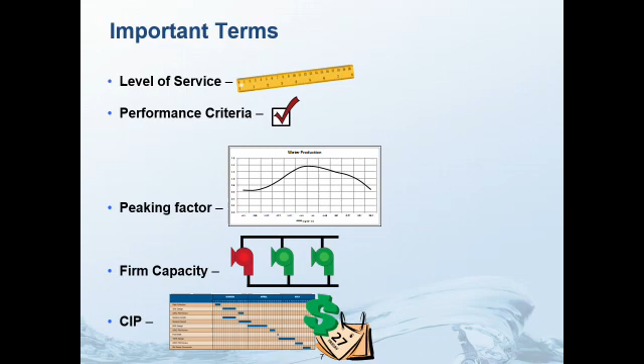Again, CIP stands for Capital Improvement Program, which is a listing of the projects that will be constructed, that need to be constructed. It has a detailed description of each project, cost information, and the timing that needs to be done. You'll see that term quite a bit.

What we're going to talk about tonight: infrastructure master planning, what goes into that, giving you some education about putting together a master plan. We'll get into detail on levels of service and performance criteria. Rob Buss will talk about the condition assessment work we've done. Then we'll talk about some water and wastewater projects and prioritization at another time. So tonight we'll be ending at condition assessment.

As far as infrastructure master planning, this master plan aligns the water resources and infrastructure with Goodyear's general plan. It's an integrated master plan because we're looking at the interrelationships between water resources, the water system, the wastewater system, and the reclaimed water system. Together, those form infrastructure that helps the city create a highly desirable and sustainable place for all to live, work, visit, and play. That's right out of your general plan approved in November, and this infrastructure plan goes to support that vision.

Another diagram in the general plan shows how the general plan forms the foundation for what the city is trying to accomplish to achieve its vision. Within that, we look at master planning for a wide variety of things. Our particular task is on the water utilities.

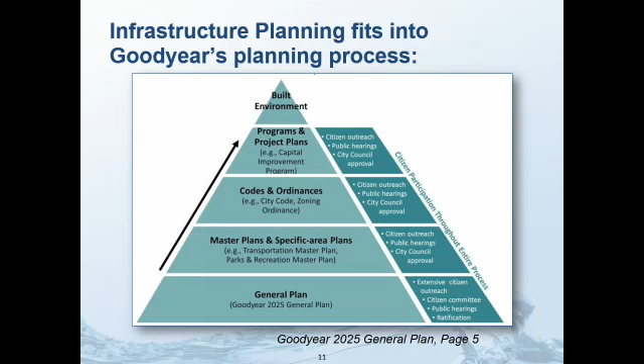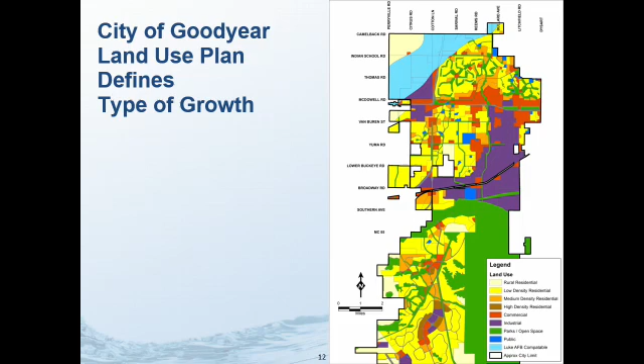The general plan also includes the land use plans. We use the land use plans to tell us the kind of intensity of development that's going to happen, which helps us size the necessary facilities. When you look at the final master plan at the end of our project, you'll notice the pipe sizes are different in different parts of the city, because the intensity of population is different throughout the city. It's responsive to this plan, so we're putting in infrastructure necessary to meet the demands associated with the particular location in the city.

So the integrated water, wastewater, and reclaimed water master plan project has a bunch of major tasks, and I'm going to go through those. The first two are the 5-year CIP, Capital Improvement Program, and a Southern Solutions Plan, as well as a condition assessment project, the first phase of that.

Basically, these two tasks together form the basis of a 5-year plan that is needed for what your existing population is. So we're not looking at anything growth related right now. We're looking at just what it's going to take in the next 5 years according to the performance criteria that you need for the level of service that your city expects.

And then later on, we're going to be doing these other tasks where we go through each one of the water resources, the water system, the wastewater system, and the reclaimed water system.

Normally, when a city hires us to do a project like this, we do the whole thing, and we put together a capital improvement program that's for the near term as well as for the long term. But because you have a rate study going on right now, the city asked us to go ahead and do the first phase of this up front, get it done quickly for the near term for your existing population, and then we will go back and do the rest of it later. So that's how we're proceeding with this project.

So what's the basis for evaluating your infrastructure needs? Well, we're looking at the level of service. This is what the customers expect in terms of flow, pressure, water quality. We look at state statutes as well as engineering practice that dictate what the performance standards are for a water or wastewater system. Those are all performance criteria that go into dictating the amount of capacity that you need for new infrastructure development.

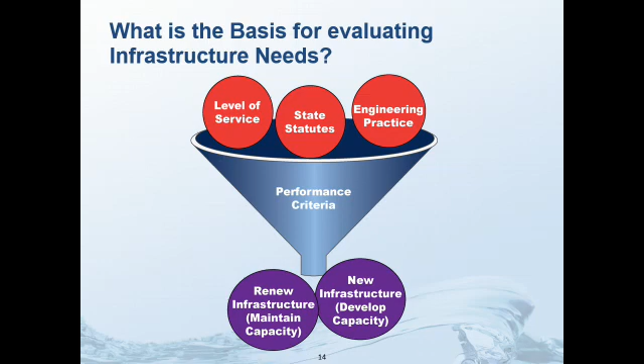But the other part of it is we can't just assume that the new infrastructure is enough to meet the needs. You also have to assess your existing infrastructure to make sure that it's in proper condition to deliver the type of service that you want. So existing pump stations, lift stations, the pipe conditions, that type of thing is the other thing that we look at. And Rob Buss will get into a lot of detail on that.

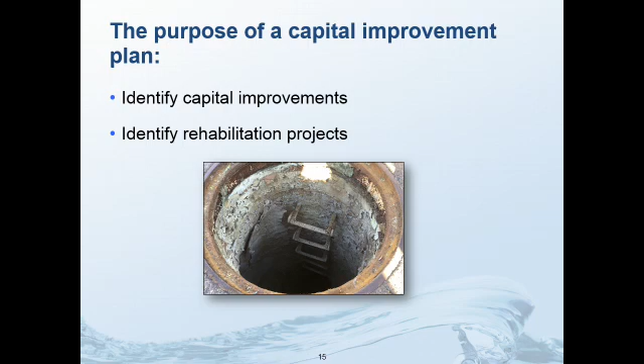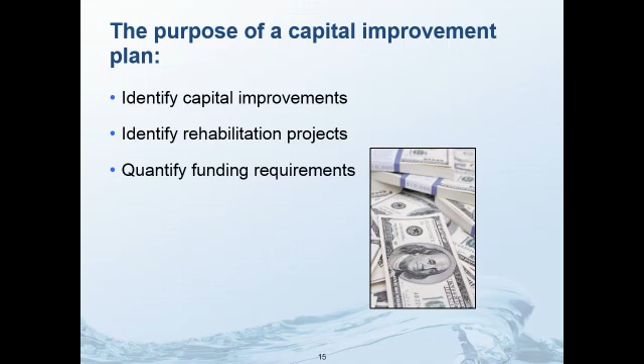With that, we'll take a break just for questions so you understand the basis for how we go forward with the master plan. Any questions at this point? Okay? Okay, Richard?

All right, next we'll talk about the levels of service and what that means and how we use this in our planning work.

What levels of service do your customers expect? This table here that we're going to put up has levels of service in several categories: supply interruptions, minimum pressure assurance, and fire flow, as well as water quality, just to show you examples of levels of service and how those levels of service could vary.

And we're going to rank them from high to low. So number one in this case, we're going to call it level 1. This water system would have no supply interruptions under any conditions. It does have a guarantee of minimum pressures that would be provided at all times, both for normal operating conditions and for a fire flow or other emergency conditions. And your fire flows, as defined by your fire marshal, would be available at any time, day or night, if you had a fire event.

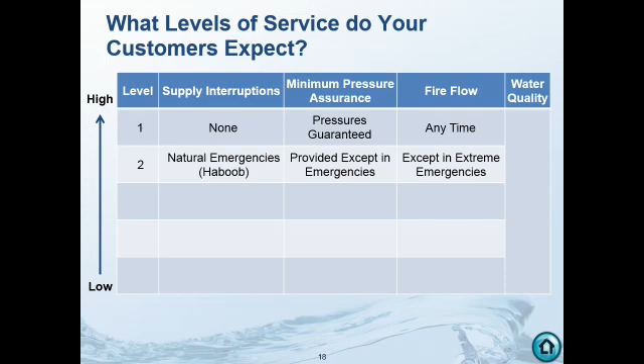The next category, minimum pressure assurance, would be provided most of the time, except in some of these major natural emergency kinds of events. Fire flow would also be available, except there could be some interruptions during these extreme events. Now, you might argue that could also be problematic, because if you've got haboobs, for example, that could be when you'd also have some fairly significant fires and want protection for that.

If you go down to level number 3 on supply interruptions, that would be an interruption to your water supply when you had an equipment failure, a pump went down, a pump station failed, or some other kind of failure of a component of your water system. Minimum pressures are usually provided, but under some circumstances you may not receive your minimum pressure. Fire flow, again, is usually provided, except in some of these emergencies when the fire flow could be disrupted.

The next level down would be supply interruptions during peak demand conditions. Without any infrastructure out, it just means your infrastructure is not sized large enough to handle your peak demands. Your minimum pressures are not always delivered. If you have problems or demands on a hot day, your pressures are going to droop and be less than what you'd normally expect. And the fire flows could be limited. You may, in some situations, not be able to get any water at all during a fire event, or you may get some water, but not what is really supposed to be delivered by the standards.

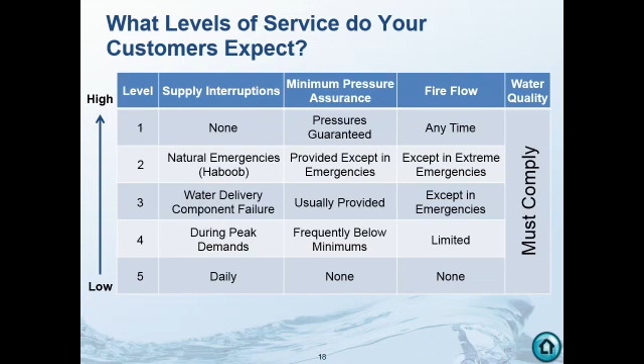So the level of service includes several things in delivering that level of service. It determines the investment a community is willing to make to manage their risk, because you can have additional redundancy in a water system, which costs money to provide, but it also lowers your risk. So it's a balancing act that cities and water delivery organizations have to manage, their costs and their risk. And the third one is customer expectations.

Each of you, as well as your neighbors and businesses and industries in your community, have some expectation about what kind of water service they're going to receive, what kind of pressures and reliability, and what's going to happen in an emergency. In addition, people who may move into your community also have expectations, and they may compare the city of Goodyear with other communities they've lived in to see what you provide in comparison with what other cities might provide.

Investments in a water system beyond the absolute minimum are designed to provide safety and reliability. These are some causes of water supply interruptions.

These are not necessarily all the causes, but you can have well failures, well water contamination, equipment failures, hazardous material releases, an extended power failure, waterborne diseases. You have issues with drought, pipe failures, or vandalism. There are any number of problems or disasters that could happen that could interrupt your water supply.

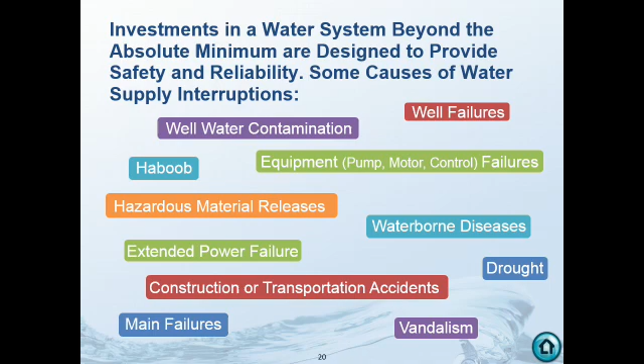So then we come back to the question: what reliability do you need, and what are you willing to pay for? When it comes to predicting future failure events, sometimes the question we're asked is, can you tell me what would happen if I don't do this or if I don't do that to enhance the reliability of your system? What am I protecting you against?

It's impossible to predict future specific failures, just like it's impossible for me to predict when you or I might have a flat tire on our car, or when we might have some other component go out. We don't know the future. However, there are some things we do know.

The ultimate failure of most infrastructure is guaranteed. The infrastructure you put in may last a very long time, some may last more than a person's lifetime, but ultimately infrastructure fails, electronics fail, mechanical equipment wears out, and you have things such as corrosion that contribute to failures in a system.

So it's not about putting in a water system and infrastructure to protect against specific events. It's a matter of putting in infrastructure to protect against a variety of different events that could occur, with the hope that if you do it right, you can avoid interruptions to water supply that your customers might expect.

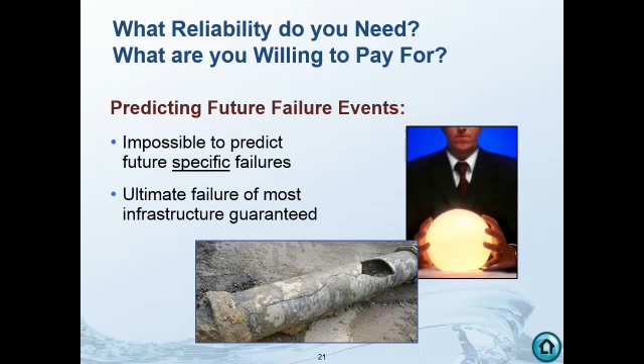So when we come to developing standards for safety and reliability, it's a little bit analogous to a car. Any car that you buy on the market today is going to have a spare tire. It's going to have a backup parking brake that you could use in an emergency. Cars all have a dual latch hood, so if the first latch fails, your hood doesn't come flying up in front of you so you can't see. Cars have seat belts plus airbags, and there's spare electrical fuses in the jockey box or in your fuse container.

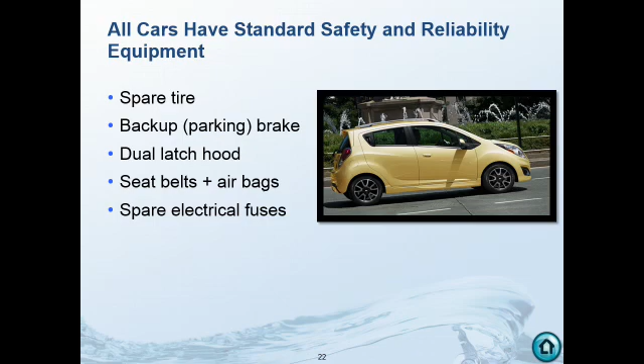The performance criteria that we use for water systems is designed to do something similar, to provide a standard redundancy for water systems, to provide the level of service that is expected for a water system. Providing water supply is a weighty responsibility. You've got thousands of people who are depending upon that water every day for their service, and most communities also have people that have health issues or kidney failures or other things that also depend on a reliable water supply.

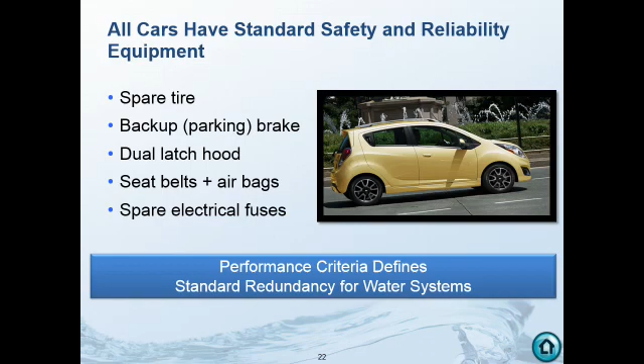Now let's look at a couple case studies that have happened here in the Valley in recent years to evaluate water supply and what happens when a failure occurs.

The Val Vista Water Treatment Plant is located in Mesa, and it is co-owned by the cities of Phoenix and Mesa. A few years ago, you may remember we had the Rodeo-Chediski fire that burned a large area on the Salt River Project drainage area. And inevitably, when you have a large failure like that, you have storms and then runoff, and then the water from that area is contaminated with the ash and carbon and so on from that fire event.

Not too long prior to when this occurred, the city of Phoenix undertook a project to optimize the operation of their system. So they did some studies, and they had some consultants help them figure out what they could do to reduce their operating costs to be able to operate their water system at a lower cost.

Then when this event happened, they had an emergency, and they had to issue a boil water notice telling people they had to boil water before they could drink it. And that created problems that was certainly less than the expectations that many of their customers had.

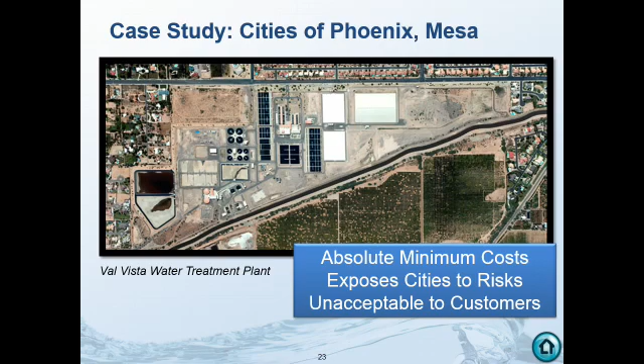So now let's look at another event, and this particular case study was the city of Goodyear last summer.

Of these wells, 2 go into the reverse osmosis treatment system at that site. The other 3 deliver water to a storage reservoir at that site. The 2 wells have treated water that goes into that storage reservoir, blended with water from the 3 other wells that don't quite meet the standard, but when blended with the treated water, it does meet the standard.

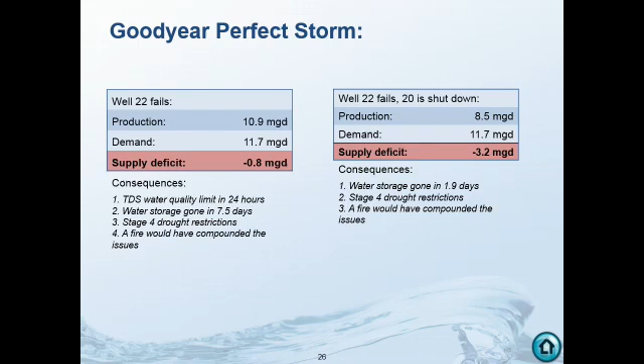When you have damage to public trust, it also becomes more difficult to obtain funding with that lower level of trust. And then if it occurs over a longer period of time, that can constrain growth and development, if people who would move to the city would perceive the level of water supply service to be less than what they might expect.

So now we're at the next point where we can stop and ask questions. Do any of you have questions over the things we've talked about in the last section?

I've got a question. On page 11, you were talking about reliability studies. You kind of breezed over it. I'm just kind of curious what type of HALT testing has been done with some of the capital equipment. Are you familiar with HALT testing? That's highly accelerated life testing for products. So typically like that VFD unit, it had to have gone through some type of testing.

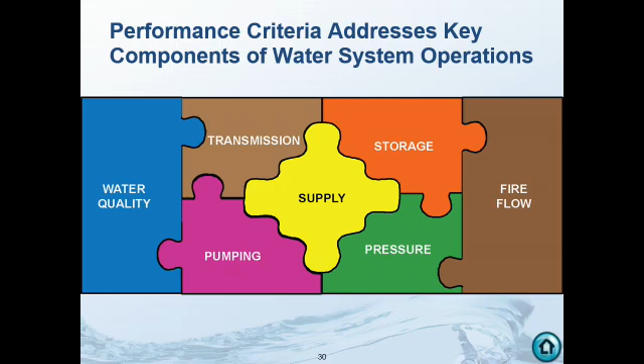And so we're going to go through and talk about these, with the exception of water quality, since you don't really get to make any choices about that, and there's a lot of constituents that would make it a complex presentation by itself.

First of all, let's talk about the standards that are the state minimum requirements, as shown in the Arizona Administrative Code, which also references another document called Engineering Bulletin number 10, which is a water supply system design document.

Now, these standards, as it says, are minimum standards, and they were also designed to apply to everything from a small residential neighborhood that may only have half a dozen houses and is not connected to any other municipal supply, all the way up to the city of Phoenix. And so with these standards, we need to work with them and apply them to the specific needs that every community has.

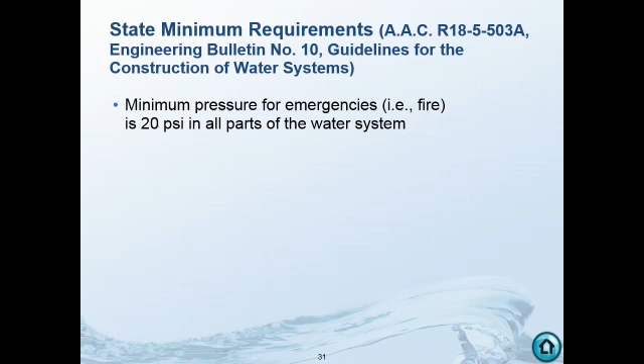The first standard is the minimum pressure for emergencies, such as a fire, is 20 psi in all parts of the water system. That one is very standard. Everyone expects to be able to deliver that.

The next one is that the minimum non-emergency operating pressure is 40 psi, and most cities strive or plan to be able to deliver 40 psi. There are some cities that have a goal of providing a higher pressure.

The next one, pump station firm capacity, is equal to the pumping capacity with the largest pump out of service. Guy touched on that briefly. So any pump station that's designed to deliver water service will have one spare pump in it.

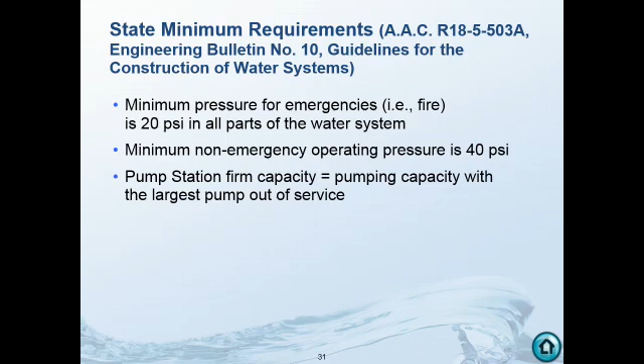The next criteria is minimum water storage, which is equal to the average daily demand of the maximum demand month. This storage criteria is directly out of the Arizona Administrative Code. There are some situations where cities may have different criteria based on their unique situation and requirements.

The next one is fire flow according to current ISO standards. When we do planning, we typically have a residential fire flow amount we need to deliver and a commercial fire flow amount. When you actually go to construct buildings and your water system, there are specific fire flow requirements your fire marshal will have for specific buildings, dependent upon the building type and method of construction. ISO stands for Insurance Services Office.

And then, as I mentioned, all water quality standards.

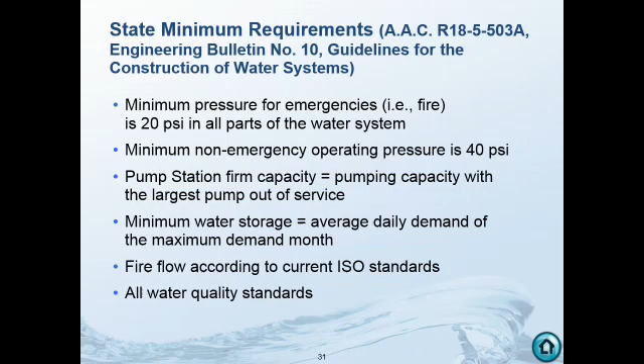Now I'm going to go through the specific performance criteria that the city of Goodyear uses. The pressure performance criteria is to maintain pressures between 40 psi and 80 psi. The reason 80 psi is a limit is that for pressures higher than 80 psi, a service line pressure reducing valve is required to protect water heaters in homes.

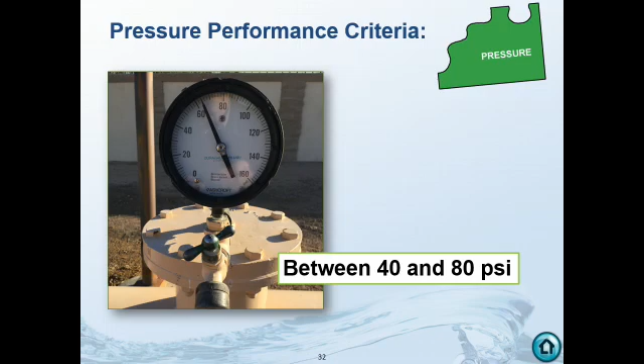The next criteria, water transmission performance, is also essentially the same for all cities. For any pipe less than 36 inches in diameter, they design to keep water velocity less than 5 feet per second. For pipes greater than 36 inches in diameter, they allow velocities up to 6 feet per second.

For peak hour demands, the peak hour being the highest demand hour of the day, the standard is to keep velocities less than 7 feet per second. For fire flow demand, velocity is to be less than 10 feet per second.

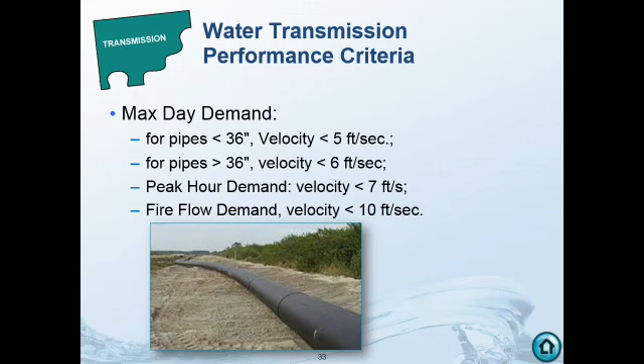All of those affect the sizing of the pipe to keep within that tolerance under those conditions. One reason you want to keep velocities lower is that energy loss increases with the square of the velocity. So when velocities get too high, you also start to get very high pumping energy costs, and it becomes very difficult to deliver fire flows.

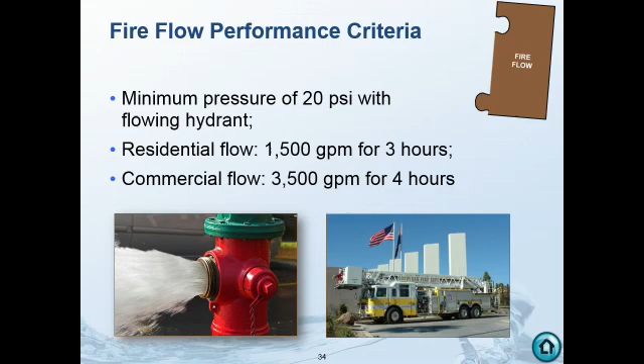For the fire flow performance criteria, the minimum pressure is 20 psi with a flowing hydrant. For planning level work, the city uses a residential fire flow of 1,500 gallons a minute for a duration of 3 hours. For commercial flow, it's typically 3,500 gallons a minute for 4 hours, and commercial flows will typically require more than one hydrant.

For the water supply criteria, the standard we've been using is to supply the maximum day demand with the largest well, plus the wells required for blending, with the largest well out of service.

Your circumstances are a little unique right now because the wells 20 and 22 we referred to earlier also happen to be your wells with the greatest flow rate. So if one goes out of necessity, the second one is not used in order to keep your water quality standards. This is how firm capacity applies here - it's kind of your weak link in water supply. When this one well goes out, it takes the other one down, so that's the focus of the vulnerability you've got. In your case, your firm capacity definition is a little different because those two wells are tied together - that's your vulnerability.

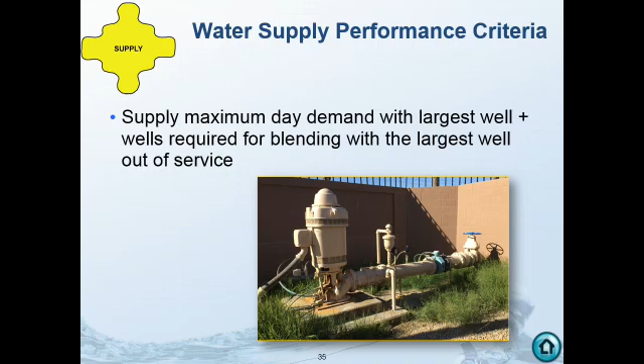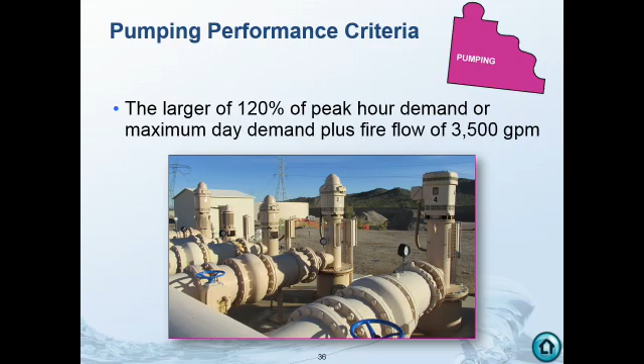The multiplier of 120% provides a little cushion, used for several reasons. First, any city, particularly one that's growing, commonly has higher peak demands because they have more customers who've moved in from the previous year. So it's difficult to precisely predict exactly what your peak hour demand is going to be. We also can't predict the weather and other factors that influence peak hour demand. So that 120% factor provides a level of conservatism to make sure you're covered if you have any undesirable events that would tax your pumping system.

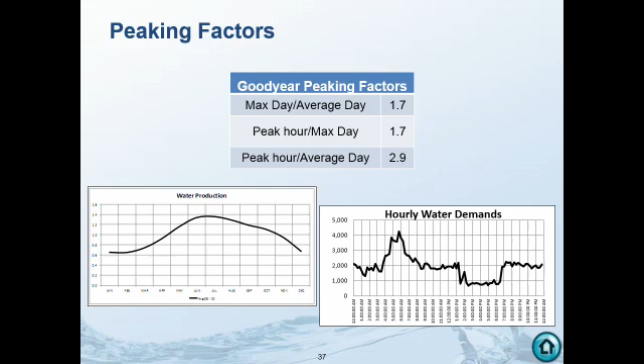Your water storage performance criteria comes directly from the state statutes, which is equal to the average daily demand during the maximum demand month. So you'd take your June or July demands and average them out for that month, and the standard is that you provide storage equal to that amount. So essentially you have one day of storage available any day throughout the year.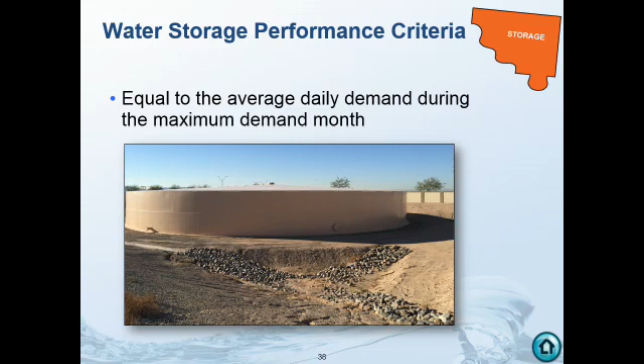So that is a brief overview of the performance criteria that we've applied for the City of Goodyear. Do you have any questions on that?

One quick question. You talked about fire pressure, pump pressure. Does irrigation have anything to do with any of this, or is it similar? Or were you just talking about residential and commercial? Well, the criteria would apply to all customers, including those who are irrigating. Okay, same pump pressure for irrigation. And typically the peak day is because of irrigation in the summertime. That's what we're dealing with, trying to meet demands associated with outdoor water use. Thank you.

Okay, any other questions? Turn it over to Rob now.

So before Rob gets started, Richard's part of the project was to look at what's necessary, looking at the performance criteria and how the system is performing according to those criteria for your existing population. Now what Rob is doing is looking at your existing infrastructure to see if it's still in good enough condition to work and be reliable to meet customer demands. So there are two components, if you recall the funnel diagram: first, what you actually need according to the performance criteria, and second, how it's performing and what we need to do about it. That's what Rob looked at.

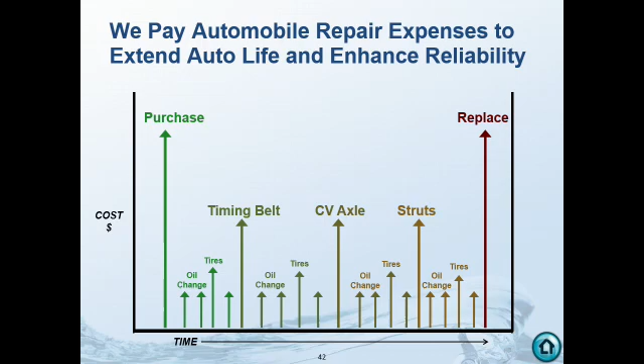And so you bring that over to water assets, wastewater. It's a little slightly different in that you're looking at some different components, but also the consequences are different, because you have a staff and you run a city that people trust you. They're trusting you to provide basic services.

For the buried assets, again, short time frame, we did not do any investigation of your buried assets other than desktop. The city has a very robust GIS system. All the assets are identified with a unique identifier. On the water side, pipelines, valves, fire hydrants. On the wastewater side, pipelines.

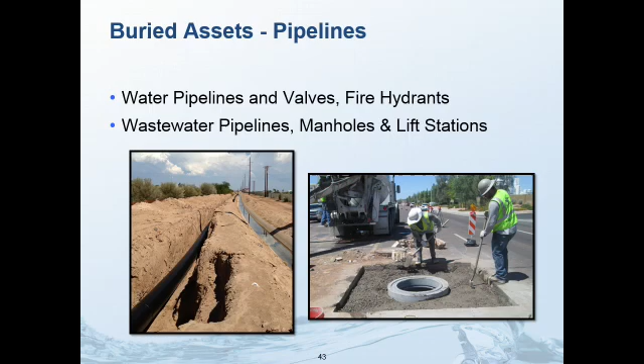So we approached our condition assessment from two angles, as it were. I had a team in our Phoenix office that took the GIS system, looking for material and age, primarily, because for buried assets, not unlike plant assets, the material that you select is real important. And I think to your point, Mario, a VFD that's 17 years old is really old. Just is. The technology has gone beyond 1998 for VFDs, if you were to do that today and buy one. So age is an important component to consider, or element to consider, when you're analyzing useful life.

There's some good news, though, for you. On the water side, your water system has about 96% of the water pipelines are ductile iron pipe. Ductile iron pipe is a step above cast iron. Many people know the term cast iron. Ductile iron has more forgiveness in the sense of impact. That's the word ductile. You're able to have some flexibility with it. The material life of both, though, is about 80 to 100 years. 96% of your water lines are ductile iron.

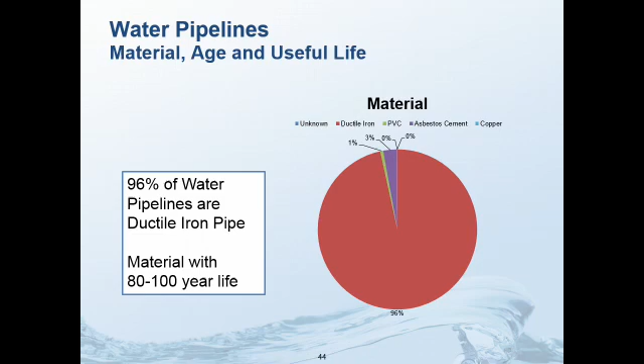I feel pretty good living here, unless they were all 100 years old. However, in your case, there's still good news. About 65% of them are only 15 years old. I think Richard mentioned earlier about some of your assets will outlive us, and they will. I mean, hopefully they will. Maybe your children's children, we don't know. But just based on industry standards, your water system should outlast your children's children, just in sheer wear and tear and the second law of thermodynamics, as it were, everything wears out.

And I might add, just one benefit of having such high quality materials for buried assets is that these are in your streets. So you don't want to be ripping up the streets, replacing things constantly like you would a VFD or a pump that's above ground, because it disrupts commerce, causes problems with the roadways, etc. So part of the reason typically engineers specify a higher quality material for something that's buried is because you don't access it frequently.

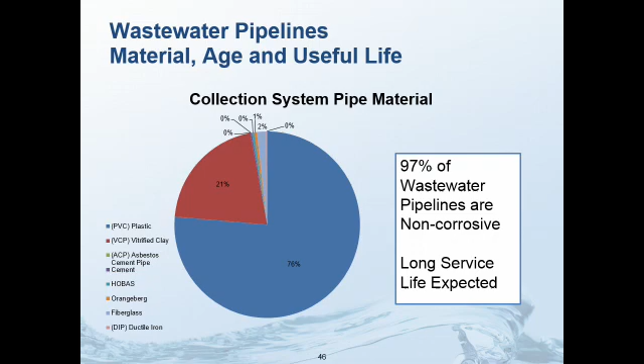Let's go look at your wastewater. You may be wondering, how about that? Well, the main component or the main element to think about is corrosion in your wastewater system. Again, some good news. About 97% of your wastewater pipelines are non-corrosive. If you look at the pie chart there, about 76% are PVC and another 21% are vitrified clay. Both are not susceptible to hydrogen sulfide, a lot of the corrosive components that are in wastewater over time anyway. So in terms of material selection, that's good news.

In terms of age, it's still good news. Again, about 65% of your wastewater pipelines are only 15 years old. I didn't give a specific lifetime for vitrified clay or PVC. Generally, buried PVC, unless you've got some chemical from an industry, should last for 50, 80, 100 years. We don't know - it's a fairly new product industry-wise. I mean, it's been around since the 70s or 80s, but that's fairly new industry-wise. Vitrified clay, of course, is hundreds and hundreds of years. So, again, some good news up front.

So on your buried assets, we really had nothing particular to add to the conversation in terms of CIP for the 5-year. My job was to look at 5-year - what is it in a 5-year CIP that we've looked at, does Goodyear need to include in your CIP? And from the water side, there was nothing. You are going to see things related to your manholes, and that's very, very common here in Arizona particularly. So you will see that in the 5-year CIP.

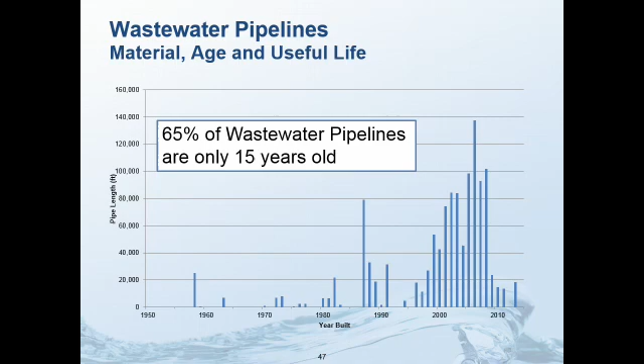Want to look at your plant assets. We took a team of civil, structural, instrumentation, and electrical engineers out on several days, again in a kind of compressed time frame. We worked with your staff to go to every site, every well site, booster pump station, particularly the Bullard RO campus, all 3 of your wastewater treatment facilities, all your lift stations. It was kind of a blitzkrieg, going to each. I'm not going to represent that it was completely thorough, because how could it be?

It was an appraisal level assessment, but it was something that had not been done before. We gave a report to the staff that has, in the appendix, all of the forms our staff was required to fill out. The form itself was a field condition assessment form which guided every person's thought process when looking at the asset. It had questions related to corrosion, vibration, heat, and in structural concrete, looking at cracks or spalling, things that are pretty obvious to see as you're going through each facility.

But the thing I really looked at, and I asked the team to make sure they rated overall each facility, was on a scale of 1 to 5. 1 means it's essentially brand new. You had no 1s. 5 meant you really need to replace it today. There were a couple. The 4s and 5s all made it on our 5-year CIP list. There were a couple 3s that also made it on the list, but generally it was 4s and 5s.

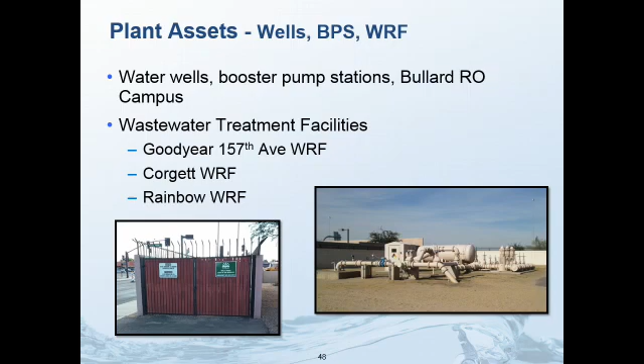So we took the inspection date and subtracted out the installation date, and all of them were essentially 50 years or older. The standard used here in Arizona for well life is somewhere between 40 and 50 years. So when you drill a new well, you may as well put it in your books for maybe 40 to 50 years for the well, not the pump, the casing. So 3 of your wells, we concluded, have no useful life.

They're working. You're like me. I've had tires that I go to discount tire, and the guy says, I'm sorry, I can't serve you unless you change that tire, it's just gone. I said, well, I don't have the money. I got to use it.

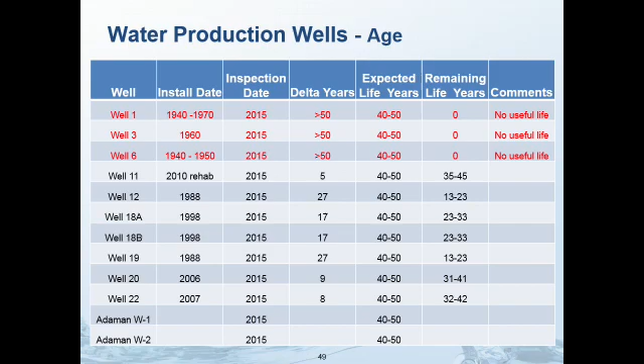But again, you're in a position of trust. You're in a position of, now I know. What am I going to do about it? I'm responsible for what I know. And there are the 3 wells we concluded need replacement.

And we found 3 more wells, identified partly through videos taken by the staff over the past several years, that need rehabilitation. So if you look at the total pumpage, we think we have 8,910, but we know about 3,000 of that pumpage may not be available to us in the next 5 years. Something may happen to the first 3 wells. The next 3, we don't know. So about a third of the wells then need replacement or rehabilitation, and that's reflected in the CIP that you'll see at another time.

Any questions? No, okay.

When you say replacement, do you mean replace the parts or drill a new well? On replacement, I mean replacement, a new well, drilling a new well. And we've talked to staff about it. We've had some discussions on how best to do that, and it's all reflected and bundled up in the CIP that you'll see later.

So that probably goes back to, was it page 45, where you said 65% of the water pipelines are 15 years old. I was going to ask, what about the 35%? But I think that's covered in the later slides. 65% are 15 years old.

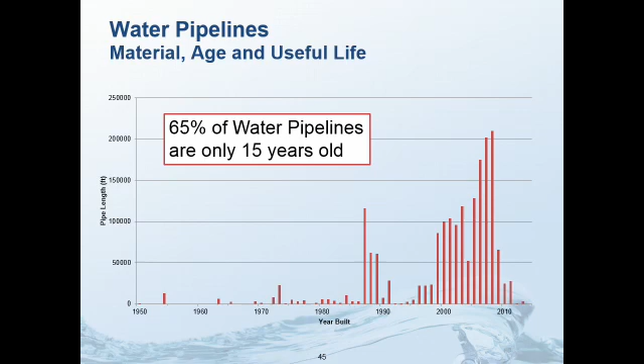So 35% is represented essentially sooner than the year 2000. I had to cut a line somewhere. So I said the last 15 years, 65% of your water lines are fairly young. You've got a lot of life left. But 35% are older, so I'm not sure if I'm helping there, but hope that makes sense. Does that answer your question, Chairman?

Sort of. Well, I wanted to know a little bit more, just to switch on you real quick, about the appraisal level. You had this field condition assessment. I was just wondering if you can talk a little bit more about that.

The 1 to 5, you mean? Yeah, that assessment that you've done, that allowed you to create your slides on page 25, right? You said there was an appraisal level or field condition assessments, rated from 1 to 5. Yes. And then I really didn't see a slide that had that rating from 1 to 5. Maybe I missed it. Well, no, you didn't miss it.

We didn't have it. Actually, my part we figured would be somewhat toward the end, only because the bigger part is probably the performance criteria. I have all the forms that we took. The actual criteria is: 1 is essentially new. 2 is you might have to commit like $50,000 — it's a judgment call of what you need to bring it back up to a 1. 3, you can see where this is going, it gets bigger and bigger.

At 50%, at a 5, if you look toward the end there, yeah, you can have that. Well, as an engineer, I'm wondering, when you talked about this field condition assessment, was there some type of engineering analysis? It sounds like it was just new, medium, older.

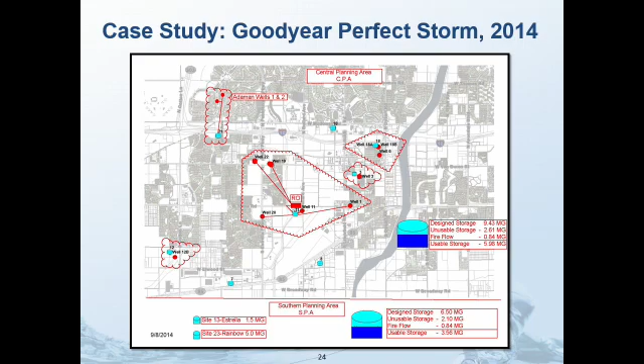I want to go back to this so I get it clear. Wells 20 and 22—if one goes down, the other goes with it, or vice versa. That's part of how the perfect storm happened. We've got 3 other wells that need replacement fairly quickly. I think that's where she was going: what happens if these old wells go down tomorrow along with 20 and 22? That's the perfect storm I think you're talking about. I didn't hear her question fully answered—you follow me? Yeah, okay.

You've got 3 pumps that are bad, plus 20 and 22 that are linked together—if those 5 go out, where are we? In trouble, yeah, that's what she was trying to say. Another way of looking at this: on slide 25, the demand at the time of the event was 11.7 MGD, and your total production was 12.9, which in reality isn't very much above the 11.7. Part of our point is that when it comes to water production, you have a problem because you don't have sufficient production to cover you when equipment goes out. You'll see in the recommendations that wells are a big component of the projects and costs to try and rectify this situation.

How would a library of parts alleviate that situation? A library of parts would help you for those specific events—parts that could fail, like in this case one VFD part, could help put that well back into service. But it's important to realize that even if you had complete parts redundancy for everything replaceable, you're still short on water production capability, and you still have wells that, because of their age, are likely to have limited usefulness going forward.

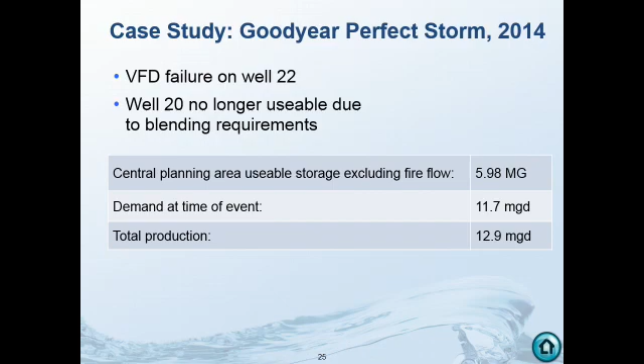The well casing is like a big giant metal straw that goes all the way down into the ground about 1,000 feet. They don't last forever. The pump or motor sits on top, but it's the casing itself that's in danger of collapsing, and then you can get no water out of it. It's like a big giant straw that goes into the aquifer. That's what's bad on those 3 wells.

So how long does it take to replace that sleeve? To drill a new well and equip it is probably like a 6-month process. So we have 3 wells that need assistance, and if we started today it would be 6 months out, and the other 2 could fail somewhere in time because they're linked together. That's why the red color.

Well, Chairman, you also have to remember you're looking at permitting, financing, studies—it could be pushed well into a year. I happen to be going through that right now. And also regulatory: can you replace the well, or do you have to file for a new well, which would be a new source?

The likelihood is that we would be able to re-drill within 660 feet. But the other issue right now is that there's a lot of competition for wells because California's in a drought, so most of the drillers are in California right now. That adds to the complexity of trying to get drillers back here to get a new well drilled.

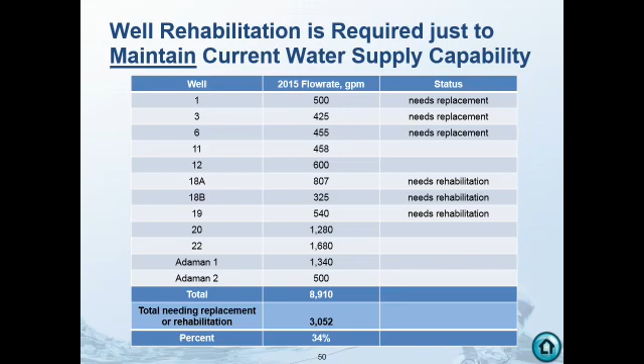Mr. Chairman, members of the committee, just want to add one more thing. We're going to have to do a comprehensive wellhead study looking at geographical areas where we would not impede on other well owners—it's a well spacing, well impact analysis. We also have 2 Superfund sites in the city and a WQARF site, which really limits the geographic area and aquifer area that we can put wells. So we've been internally looking at where we can look for new well sites, and it's very, very limited.

Just wanted to bring that up - that alone is a study that's probably going to take between 6 months and a year to find out where we can drill. Then we have to go to the Department of Water Resources and get exemptions to go beyond the 660 rule, which was brought up a few minutes ago, to move away from either Superfund or other areas. Then it's the permitting, and if you get the waiver for the 660, now you're into a well spacing, well impact analysis, which is a groundwater model. So realistically, we're looking at probably 2 years to drill 1 well.

That would be the first well that would actually be drilled, 2 years from the time you start a wellhead analysis in the city of Goodyear, just from all the dynamics here. I just want to make that clear - this is a very long process.

When did you start this process? Because we see a study here talking about 3 wells that are old. It sounds like either try to bore them out - I don't know the correct terminology - or make a new well. Did you know ahead of time, or did you just find out that we need to go forward and drill a couple more wells? Because it sounds like we're going to have an issue here pretty quick.